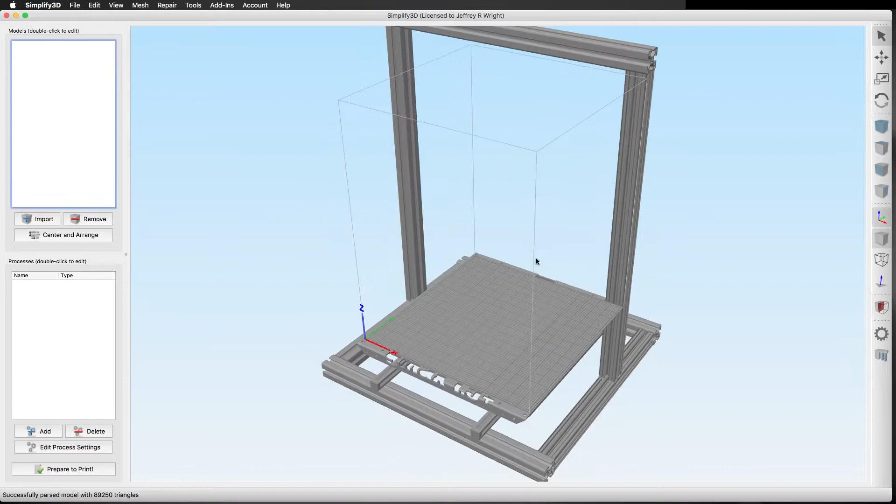Okay, so here we are in Simplify3D version 4.0, and I'll show you that this is indeed version 4.0.0, so it hasn't been updated. I'll drag over our vase model, and as you can see it is tiny, so we're going to scale it up to 400%, and we'll just hit done. You can see I don't have any processes in here, so let's go ahead and add a process.

This just has some basic settings. Under the Advanced tab, you can see that there's no start and stop points, so we'll just hit OK. We have our model selected.

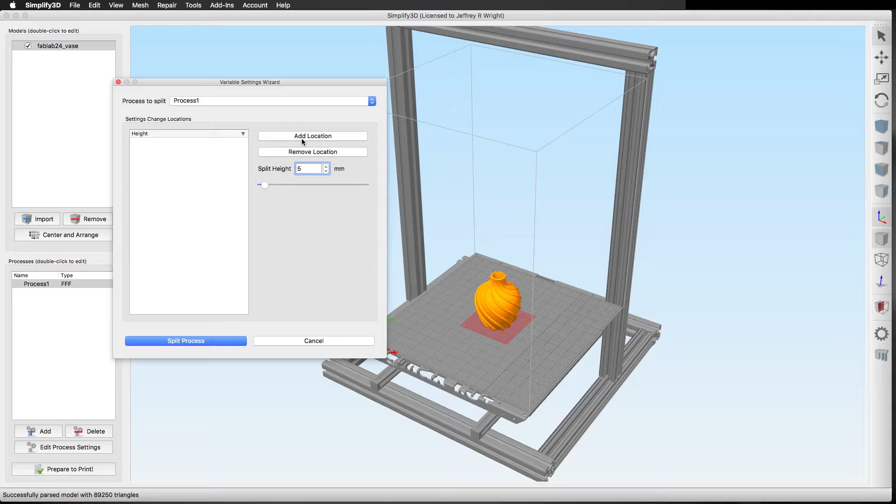We'll go under Tools, Variable Settings Wizard. We'll put in 5 millimeters as a rough spot where we want this to change our infill amount, and this will give us a nice solid bottom. The remaining part of the vase won't have that 20% infill in it. We'll do 20% for the bottom and 5% for the rest.

So we'll add a location, and we'll go split process, and now we have our 2 processes. We'll double click really quick on the first process, we want 20% infill. We'll double check that it's stopping and starting in the right points. We'll go to process number 2, and we'll drop the infill down to 5%. We'll go into the Advanced tab, and we can see it starts printing at 5 millimeters.

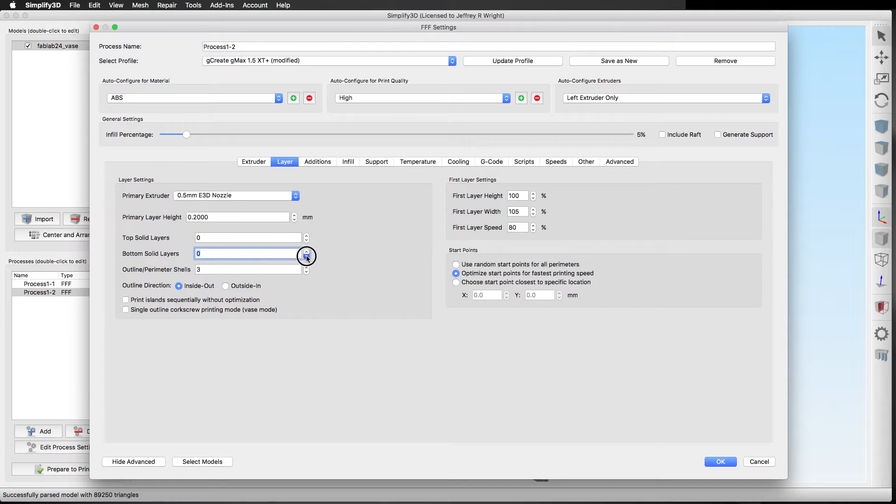And we can go in here, and we do have top layers, but let's turn them off for demonstration purposes only, because we don't need any top layers for the rest of the print. Let's turn off our skirt and our brim. That should be it, that should be good. I'm not going to save anything. You can see we did not save our factory file.

And if I hit prepare to print and do select all and OK, we'll let this process, and we'll zoom in here. It'll take a second to process. This is kind of a detailed model, there's a lot of polygons in it. And here is our finished slice.

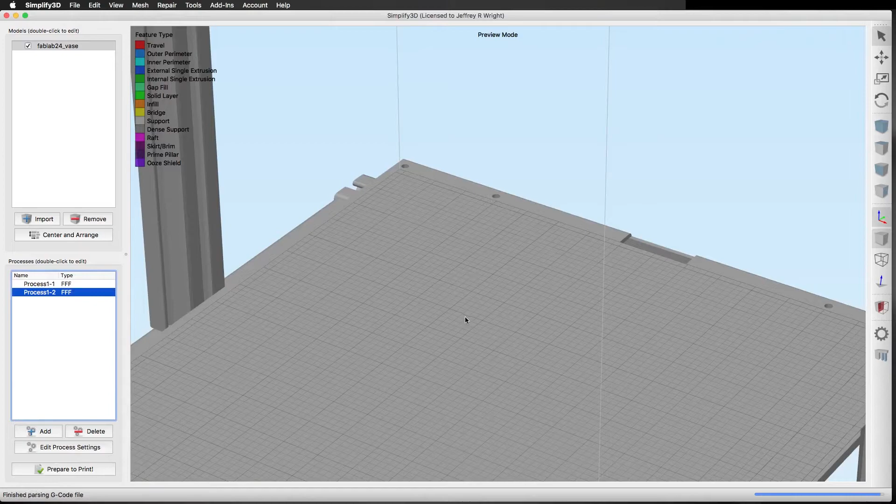As you can see, using the variable settings wizard, we do still have top layers, even though I've turned those off in the other setting. So even if it did start doing a different infill later on, or if my measurement wasn't exactly close to where we need to be at 5 millimeters, we do still have top layers.

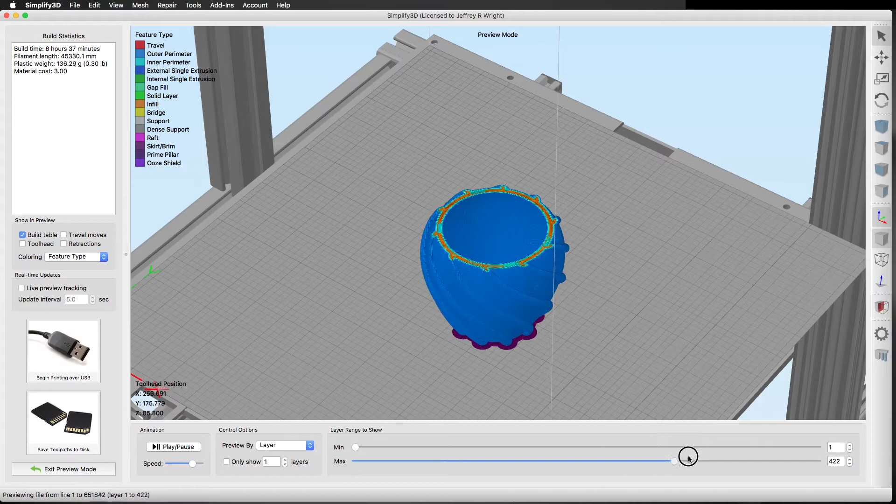The top layer function is still in there, and I can show you that it will add top layers. We'll go into process number 2 and add a couple of top solid layers. Now, because there are no top solid layers within the rest of the model, this function will go to add a little bit more plastic around the edges near your thin walls, and I'll show you.

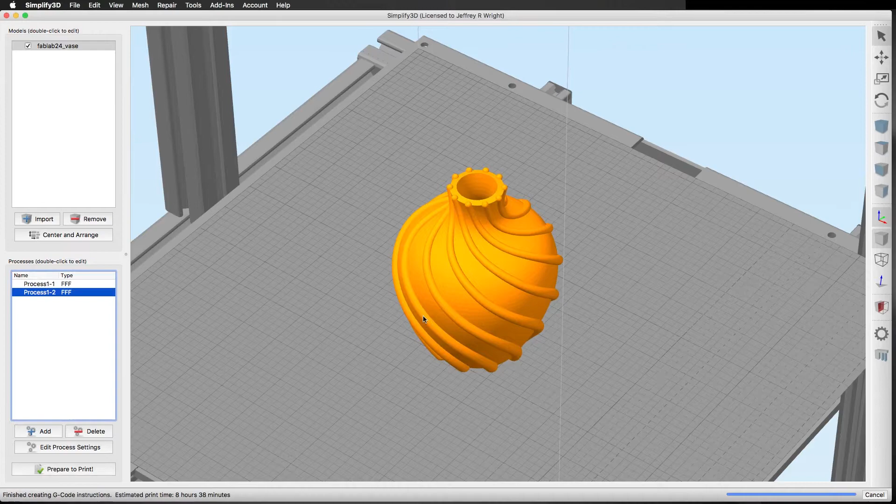We'll go prepare to print, select all, hit OK, and once this processes, we can dial it back a little bit, and you can see now that there are top layers within the model again, so it has been added back. Or it just was something that they decided to keep in Simplify3D version 4.0, and they changed the way the settings are.

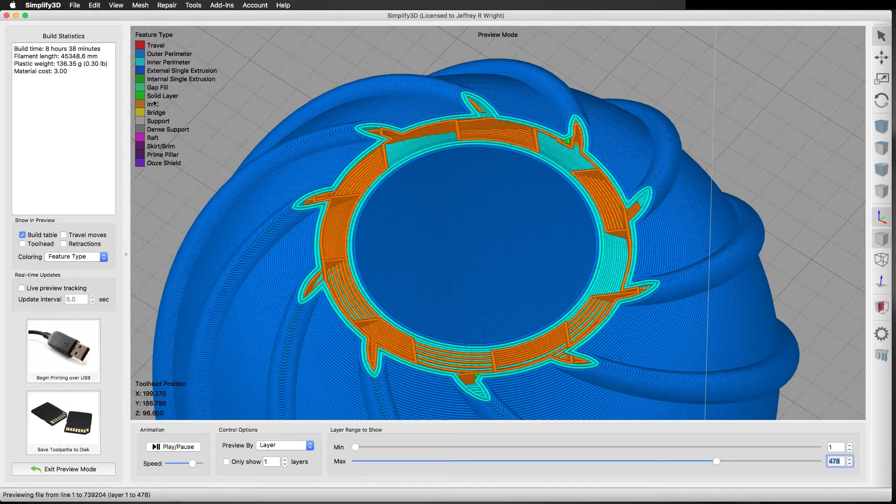Because you can see, if we zoom in here, in some areas, here's a little green, that's a top layer, and it is putting in, there's some more there, a little bit what they call top layers, and these are considered solid layers, I should say.

So if we turn that off, those go away. If we go back in here, we go back to process 2, we turn off our top layers, hit OK, hit prepare to print, select all, hit OK, go back this up a little bit, and you can see it will not add any more of those solid layers.

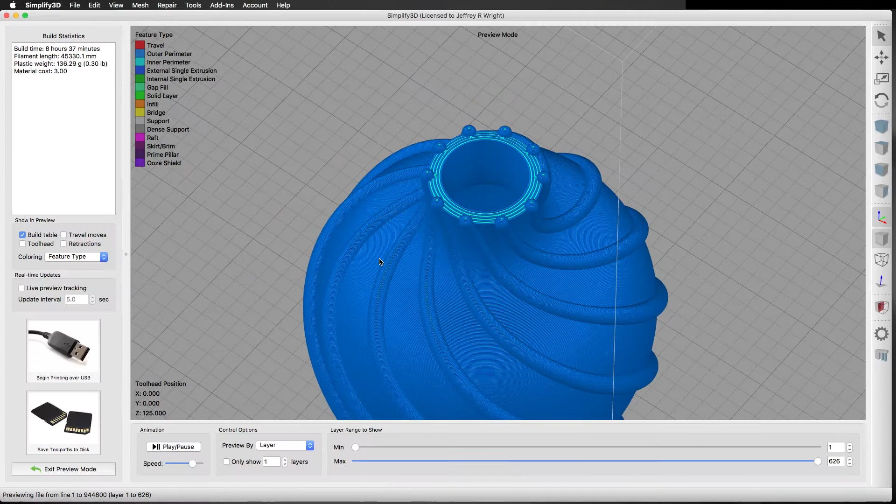So the top layers function within the variable settings wizard is there. And I was mistaken, and like I said, I'm retracting my statement in my 7 cool new features and upgrades video, where I said the top layers was removed from the variable settings wizard to ease printing. But it appears that it is back, and you can see here that we aren't getting any more of those solid layers, so that's going to save some time and plastic.

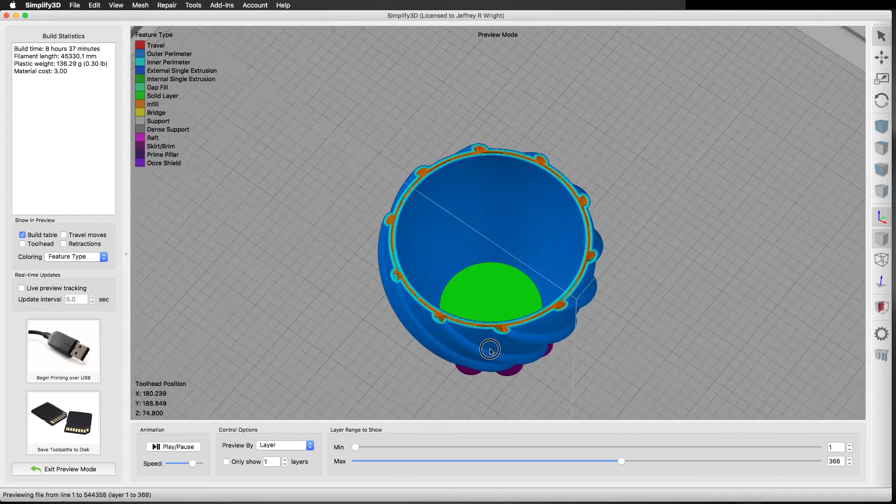And as you can see in the bottom, we have top layers. So the top layer function within variable settings is still there. It does still work. So this proves that theory, and let's head back to the workbench and discuss this a little bit further.

As you can see in Simplify3D version 4.0, and I did the process from a scratch document so you guys could see the whole process, you do still get your top layers. Now I don't know if they re-included the feature at the last minute before the release, or if it's just something that's been pushed out over the last week. But I know in their original features and upgrades list, they did mention that top layers had been turned off for ease of printing. But they are back on again, and I showed you in the Simplify3D video that they are.

And the print itself looks awesome. There are no blobs, no globs, no layer skips or layer shifts. There are no signs of under extrusion anywhere. There is a few blobs from the layer change, but that's 3D printing - you can't control where that seam is, it has to change layers. But the rest of the print looks awesome, and I'm super happy with the results.

I really love this MatterHackers PRO PLA in the color of blue, and my gMax did such a stellar job on this. I am really impressed. Because it has infill and walls, this is actually a very practical print, and we'll probably use this on one of our desks to hold some flowers or even some pens because it's big enough. You could probably use this as a paintbrush wash too, because it's thick enough and has enough walls, and the opening is small enough you could fill it with water and use it to rinse your paintbrushes. But either way, it's a very practical print, and I can see printing this out gMax size in a couple of different kinds of materials too.